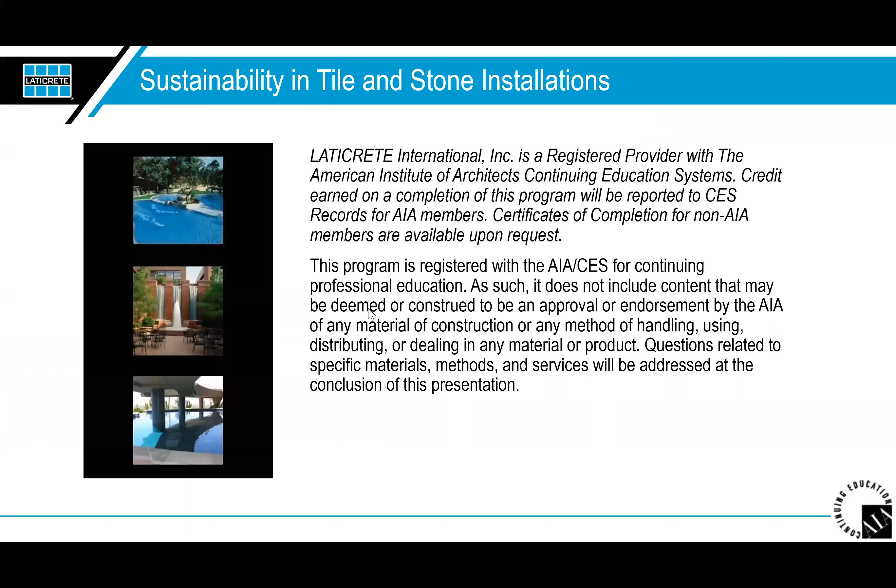Learning objectives today: this presentation will address green construction concepts and the challenges and benefits of green construction, as well as what they mean to the tile industry. We will also talk about why the tile industry has to get on board with being green and be at the forefront of moving that forward. This presentation will also address any recent changes to LEED and the Living Building Challenge, and what information is currently available and where to get it.

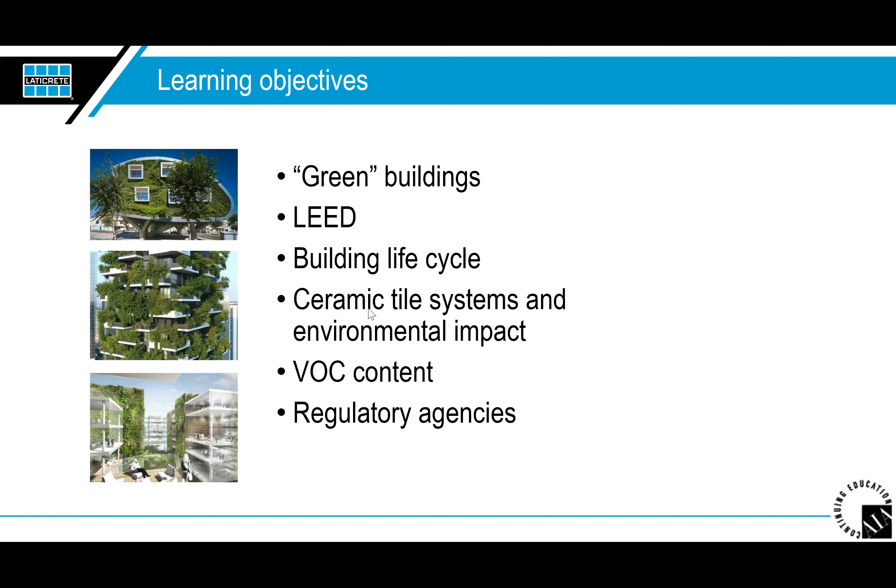Understanding the life cycle and comparisons between tile and other floor finishes, learning how ceramic tile systems compare with other floor coverings regarding sustainability and environmental impact, and understanding the VOC content in ceramic tile and installation materials.

The world's not what it used to be. There's little doubt that design, construction practices, and material production have come a very long way over the past couple decades. Buildings are more environmentally friendly, healthier for building occupants, and built to higher construction standards. And really, they're more beautiful and functional than ever. The biggest reason for constructing and renovating a building to a green standard is to minimize the impact of the building, both during construction and throughout the life of the building, on the environment and the people in the building, while improving the profitability of the building and increasing the return on investment.

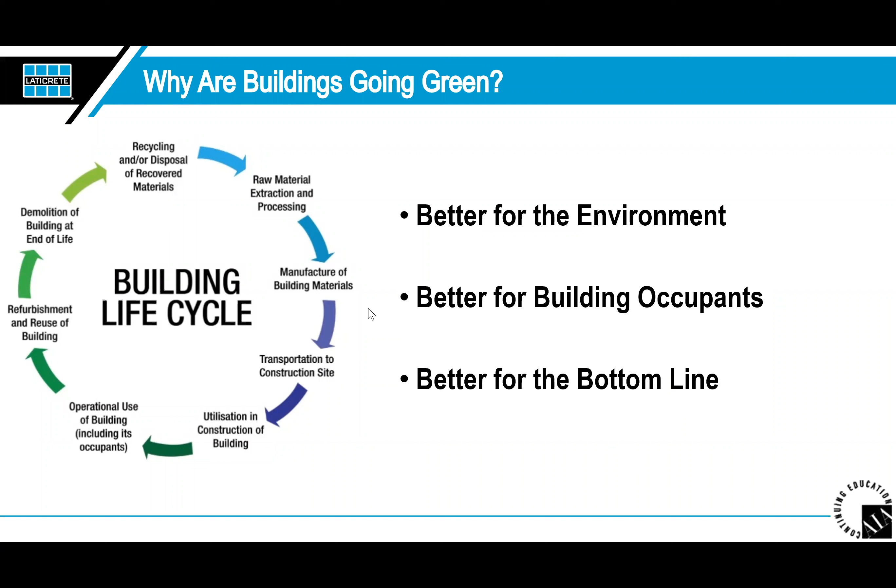We'll talk about each of those impacts in the following slides coming up. A green building is a building that in its design, construction, and/or operation reduces or eliminates negative impacts and can create positive impacts on our climate and natural environment. Green buildings preserve precious natural resources and improve our quality of life.

There's a number of features which can make a building green. These would include things like efficient use of energy, water, and other resources. Use of renewable energy - solar energy is getting very popular now; it has been and continues to get more popular. Pollution and waste reduction measures - how much are they able to reuse and recycling measures that they take in the building itself.

Good indoor environmental air quality, a big factor with the world we're living in right now. Use of materials that are non-toxic, ethical, and sustainable. Consideration of the environment in design, as well as consideration of quality of life of the occupants in its design. And then lastly, but not least, a design that enables adaptation for a changing environment.

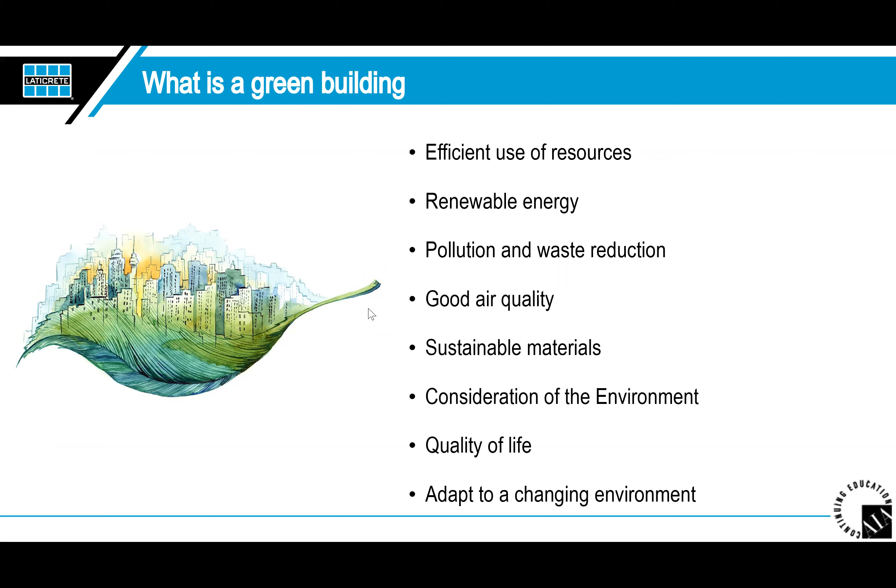It's been stated that people spend almost 90% of their lives indoors, and that some interior environments may actually be more polluted than exterior environments. Maintaining a healthy indoor working environment is critical to maintaining a healthy and productive staff who enjoy coming to work every day. A building environment that is well designed, nicely decorated with plenty of natural light, views of the outside, temperature controlled, comfortable, and which contains no toxic or harmful chemicals, will not only command a higher rental fee, but it would also maintain a higher selling price in the future.

One of the key drivers to having green buildings and green building programs was an event which occurred back in 1976 in Philadelphia at the Stratford Hotel. It consisted of the American Legion Convention, and they had around 2,000 people that attended.

A total of about 220 attendees actually contracted Legionnaire's disease, and 34 of those people died from pneumonia caused by the disease. It was determined that the hotel's HVAC system became an ideal environment for growth of Legionella, the bacteria that causes Legionnaire's disease, and it was an efficient way to distribute the disease throughout the structure, coming into every room.

Poor air quality is one of the major causes of why employees miss time at work and generally drives production down. Adhesives, paints, sealers, and other materials used in the green project can have an adverse effect on the building's occupants. Using low VOC content and low VOC emitting materials has a profound effect on building occupants and on the people constructing the building themselves.

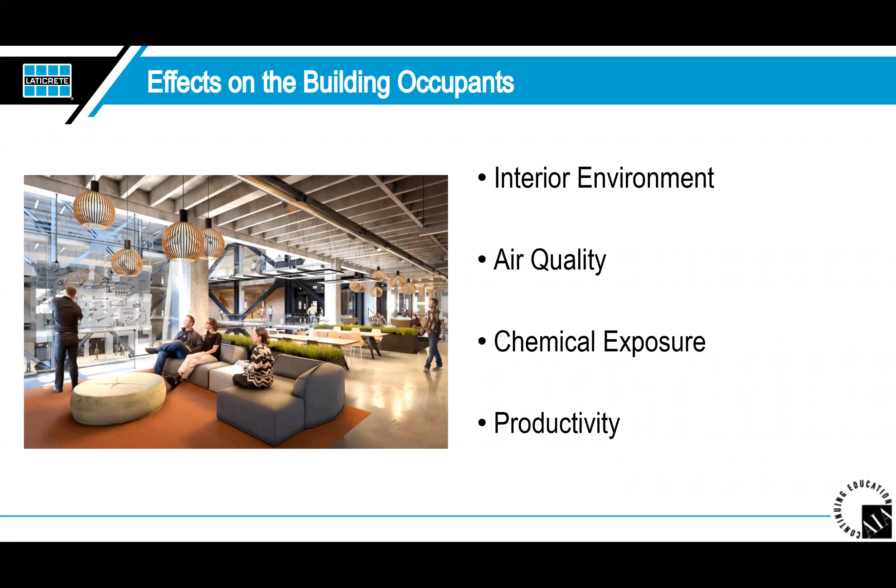As we mentioned earlier, buildings are the largest users of electricity, so it only makes sense that saving electricity could also save money for the building owner.

Back in 2014, the University of Hawaii did a report claiming they saved $3.4 million just in 2014 alone, based on reducing energy usage.

It has been reported that the return on investment of green buildings improves by 19%, with lower electrical costs being a large contributor to the savings. Auto shut-off lights are an example of that.

Lights operating on motion detectors, for example, low energy use bulbs, best practices for building occupants, and improving the efficiency of the HVAC and the rest of the building's infrastructure, all help lessen energy usage.

Buildings which meet LEED rating criteria may be eligible to receive tax credits based on federal, state, and local laws as well.

Energy credits or income revenue can be achieved if the facility produces its own electricity and sells power generated during times when the facility is using minimal energy, so they can actually sell it back to the electrical grid. Solar and wind electrical generation are two of the most widely used methods of producing electricity on site.

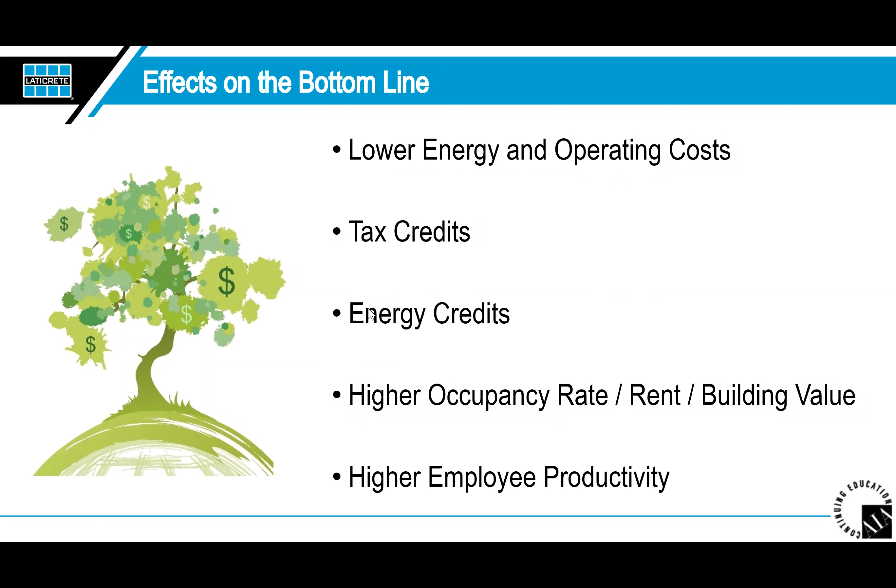So the benefits of a green building, as we discussed, include reducing wastage of water, conserving natural resources, improving air quality as a big factor, protecting the ecosystems as well, reducing operating costs, improving occupant productivity, and the social benefit of improving the quality of life in general.

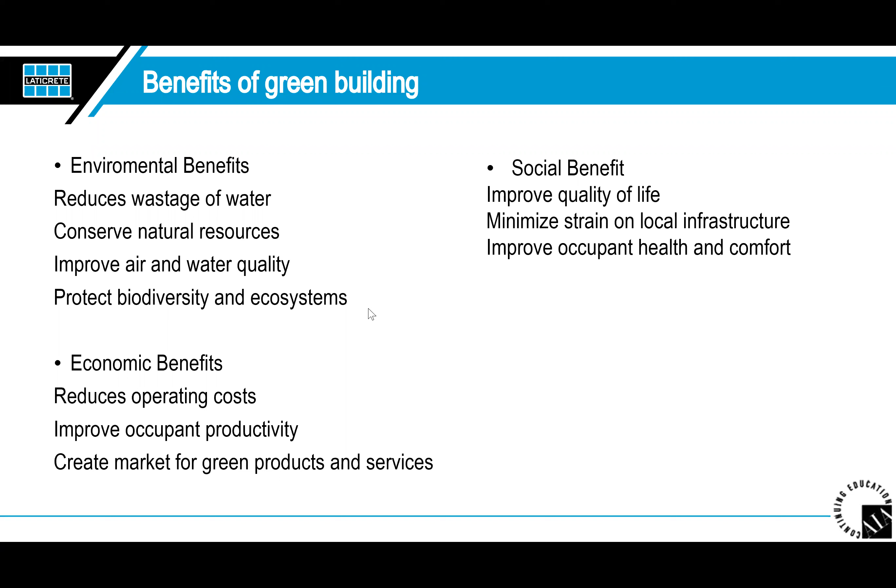There's a number of different building standards and rating systems used around the world. Due to a time crunch, I'm going to focus on the two most commonly used: LEED, by the United States Green Building Council, and the Living Building Challenge, by the International Living Future Institute. The main focus today will be LEED because it's the most widely used green rating system on the planet. While the Living Building Challenge is gaining traction, it's still behind the US GBC's efforts in terms of total number of projects, global use, and overall acceptance.

The global green building market is forecasted in 2019 to be $234 billion, including an estimated 20% of all US commercial real estate construction. This trend is expected to intensify in coming years. It has been estimated that commercial building owners and managers will invest around $960 billion globally by 2023 on greening their existing infrastructure. So they're going to be doing a lot of green work on buildings that already exist too.

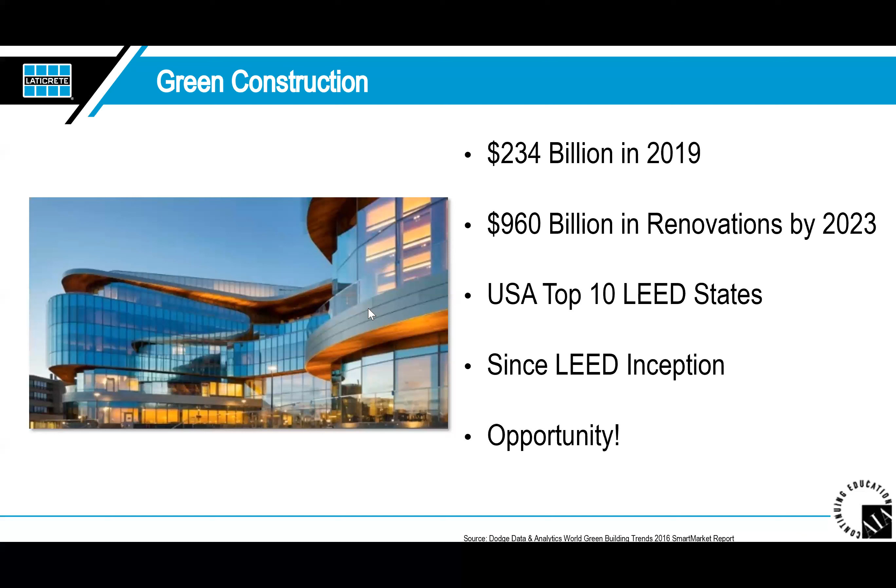LEED is the most widely used green building rating system in the world, with around 80,000 projects certified in construction or registered across 162 different countries. As of June 2015, there had already been 32,500 certified commercial projects around the world, and among all LEED projects, there have been around 4 billion square feet installed, as estimated.

It's my understanding that individual countries have some ability to customize the LEED rating system to meet local requirements, different design practices, and resources they use, but in general the result will essentially be the same. The building pictured here is Taipei 101, which is the largest and tallest LEED platinum building in the world, current as of 2015.

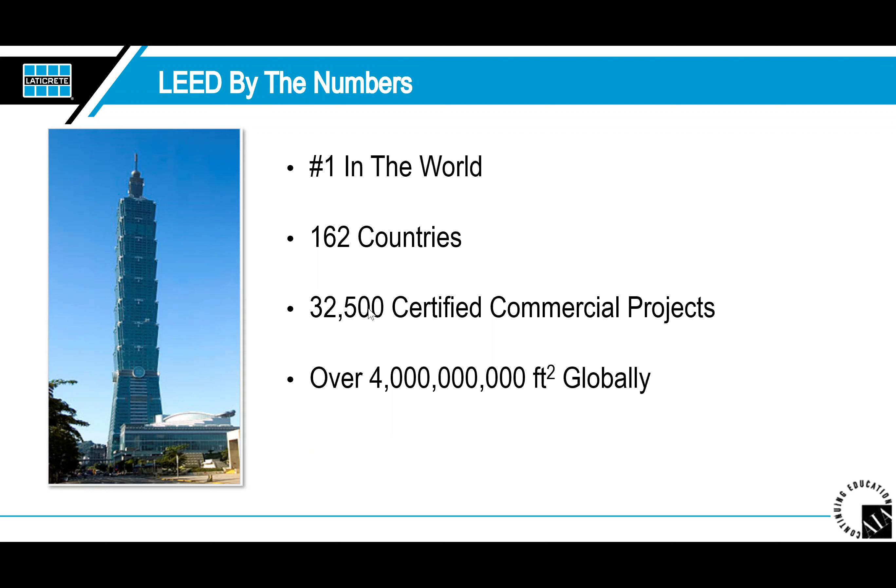LEED, Leadership in Energy and Environmental Design, is an internationally recognized green building certification system developed by the U.S. Green Building Council. LEED provides building owners and operators a concise framework for identifying and implementing practical, measurable green building design, construction, operations, and maintenance solutions, improving performance across all the metrics that matter most: energy savings, water efficiency, CO2 emission reductions, improved indoor air quality, and sensitivity to impacts on natural resources.

LEED is flexible enough to apply to all building types, commercial as well as residential. It works throughout the building life cycle, going from design and construction to operations and maintenance, to tenant fit-out, and then to a retrofit if needed down the road.

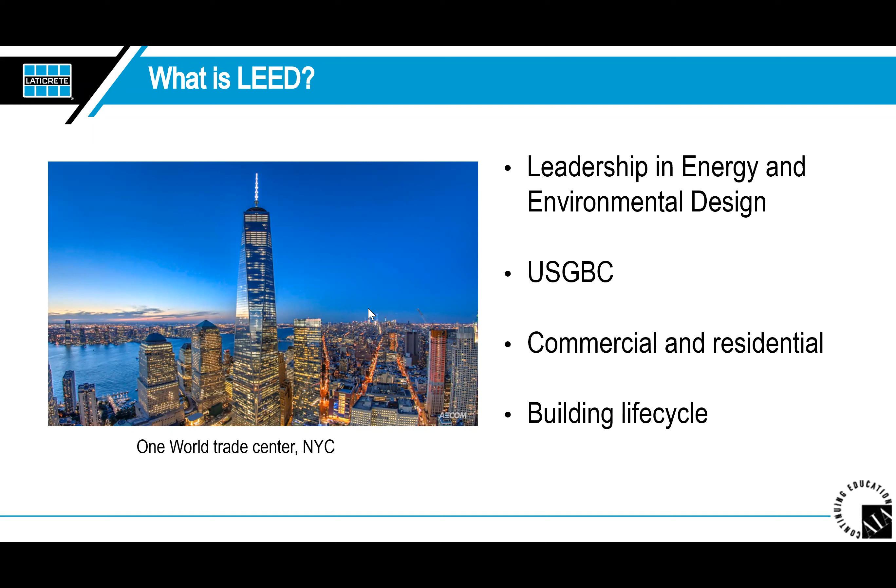LEED provides a point system to score green building design and construction. The system is categorized into 5 basic areas: sustainable sites, water efficiency, energy and atmosphere, materials and resources, and indoor environmental quality. Buildings are awarded points based on the various sustainable strategies achieved. The more points awarded, the higher the level of certification, so you can go from certified to silver to gold, and currently the highest ranking would be platinum.

LEED certifications, which will be the focus of this article, are designed in accordance with the rating system for the sustainability of the design, construction, maintenance, and operations of the building. They have different types of identifications for that: BD+C is an example, which is building design and construction. Then you have interior design and construction, building operations and maintenance, neighborhood development (ND), and also homes, which has no abbreviation. LEED is a living rating system. After authoring a rating system, it goes through a lengthy, field-piloted refinement prior to the official launch.

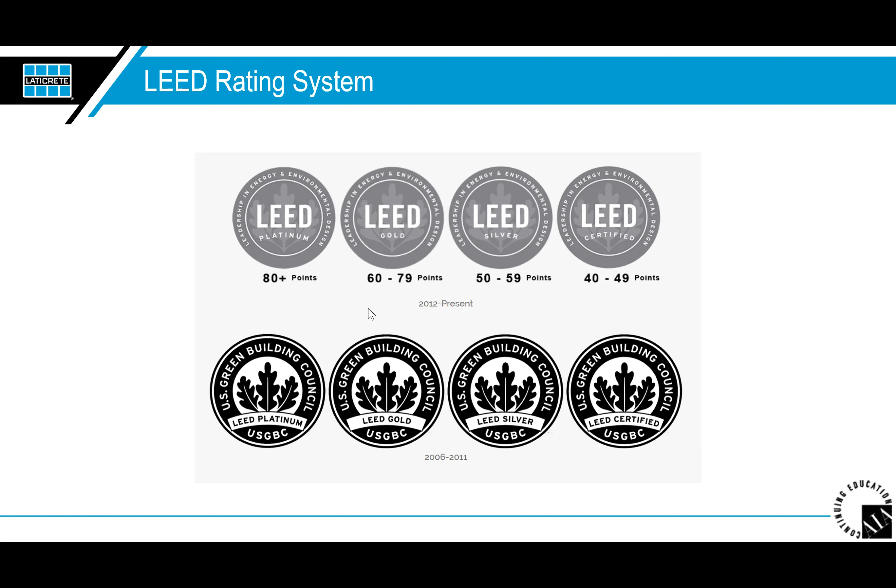LEED V4 was made mandatory for LEED projects registered as of midnight on November 1st, 2016. LEED V4 is very different than its predecessor, LEED 2009, which required an almost unimaginable amount of transition work for many in design, construction, and construction materials manufacturing industries. I don't have enough time here to discuss all the changes and differences between the 2 rating systems, but we will address a couple further on in the presentation.

There are 8 different categories: location and transportation, sustainable sites, water efficiency, energy and atmosphere, materials and resources, indoor environmental quality, innovation, and regional priority. There are 110 available credits to choose from when determining which LEED level the project will achieve, whether it be certified, silver, gold, or platinum.

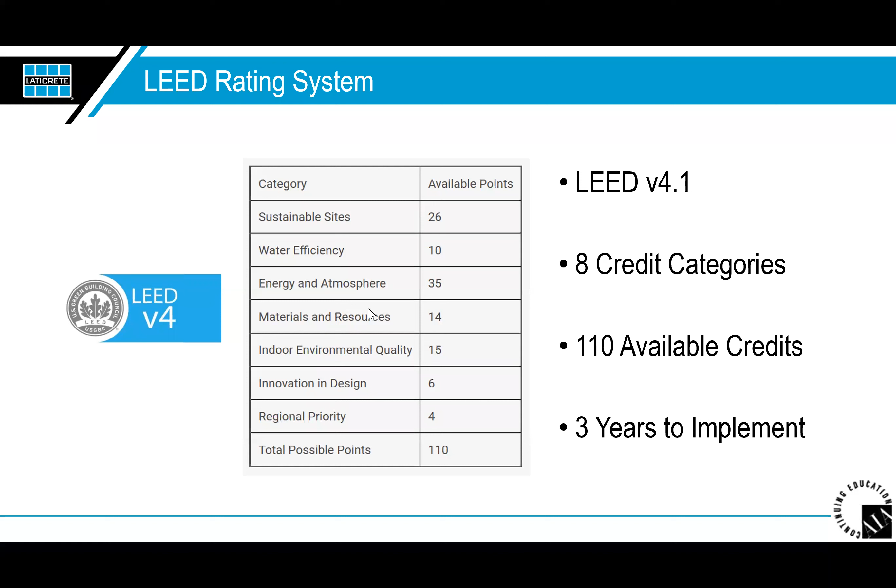By participating in LEED, owners, operators, designers, and builders make a meaningful contribution to the green building industry. By documenting and tracking the building's resource use, they contribute to a growing body of knowledge that will advance research in this field and improve the system over time. We've already talked about lower operating costs, energy and water conservation, the health of building occupants, and the financial incentives. However, there are other benefits as well.

Recycling the waste or scrap of building materials means less waste going into landfills. It also helps support the recycling industry, which promotes the development of newer and more efficient recycling technologies. So we're helping that industry out as well.

Another impact of lowering energy use is that less electrical use means demand for power from electrical generating facilities goes down, and therefore we have lower greenhouse gas emissions. This helps air pollution, lessens the impact of these gases upon the ozone layer, and generally lowers the impact of these emissions on global warming as well.

Excuse me, one second.

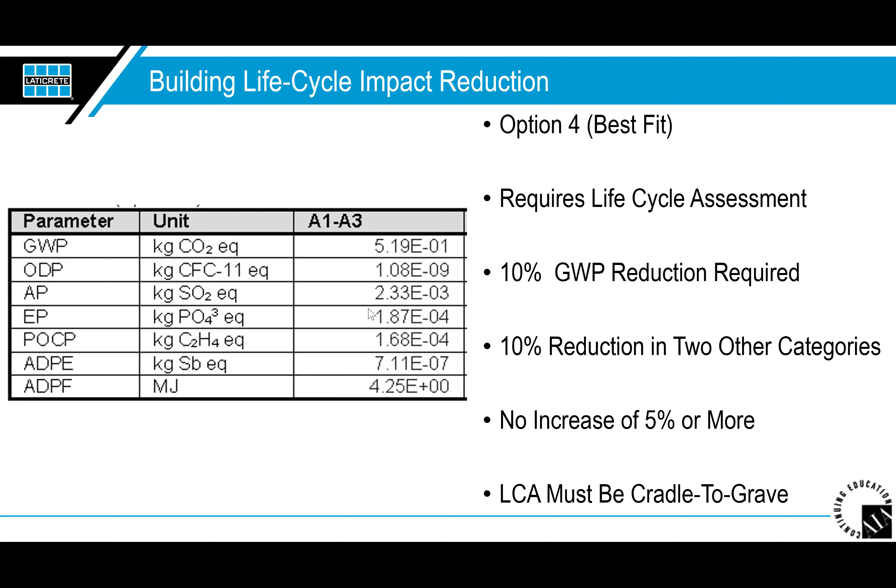Including global warming potential, depletion of the ozone layer, formation of tropospheric ozone, and depletion of non-renewable energy resources. The best fit for tile is option 4 of this credit. The credit requires a 10% reduction in global warming potential and a 10% reduction in at least 2 of the 5 categories without increasing any by more than 5%. The life cycle assessment performed must be cradle to grave, so gathering proper information for all of its components is critical.

Building product disclosure and optimization environmental products declaration is a new credit for LEED V4. An EPD is a comprehensive, globally harmonized, and independently verified report created for a product manufacturer or manufacturers with documents that impact the environment throughout its life cycle.

Information on these environmental impacts includes raw material acquisition, energy use, energy efficiency, content of materials, chemical substances, emissions to air, soil and water, as well as waste generation from cradle to grave and other standard time references. The EPDs are created and verified in accordance with ISO 14025 and are based on a life cycle assessment according to ISO 14040 and ISO 14044. So the intent of the EPD is simply to provide transparent information on the life cycle impact of the product over a designated time span.

Ceramic tile, actually made in the United States by 11 different manufacturers, has done the necessary work and gone through the steps to create an industry-wide EPD, which requires a life cycle assessment from each tile manufacturing company involved. The EPD from each company is then combined to create an industry average, which is reported to the industry-wide EPD.

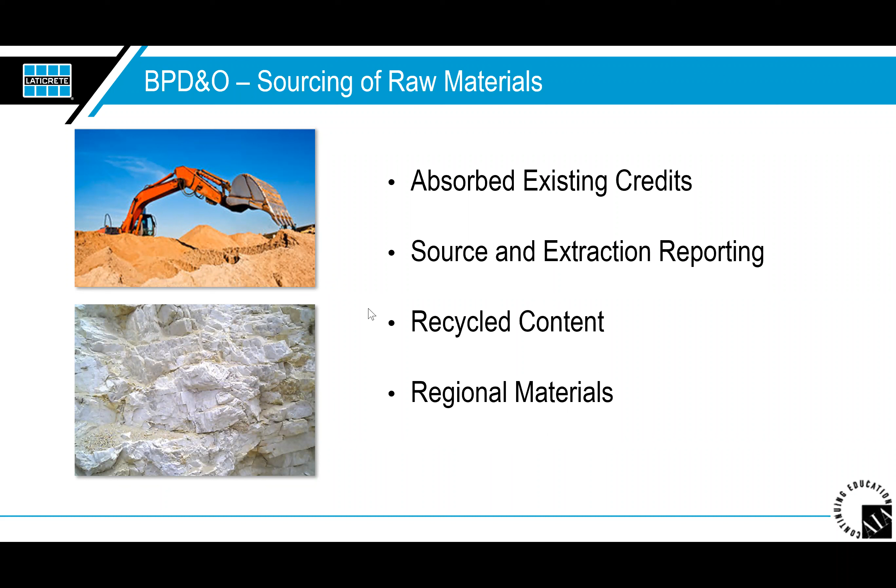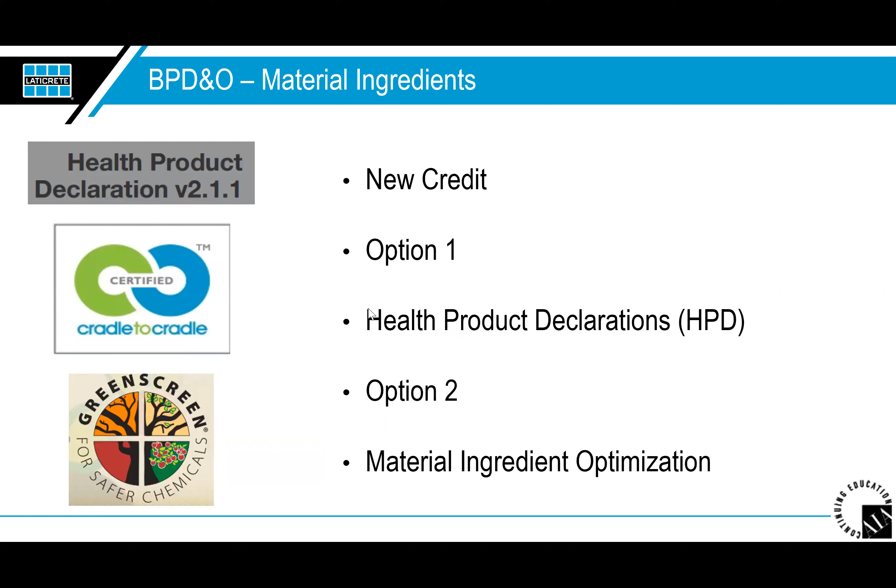The intent of the EQ credit, low emitting materials, is to reduce the concentrations of chemical contaminants that can damage air quality, human health, productivity, and the environment. This new credit combines 4 credits from LEED 2009 into one, and now includes the VOC emissions reporting requirements, which we were talking about earlier.

VOC content, as before, uses South Coast Air Quality Management District Rule 1168 for tile adhesives, subfloor adhesives, sealants, sealant primers, and other categories for determination of maximum acceptable VOC content levels. VOC emissions require testing to the California Department of Public Health standard method V1.2, and must be reported showing the range of total VOC emissions after 14 days as specified by the California Department of Health.

It's important to note that products which are UL GreenGuard Gold certified are tested in accordance with the California Department of Health standard.

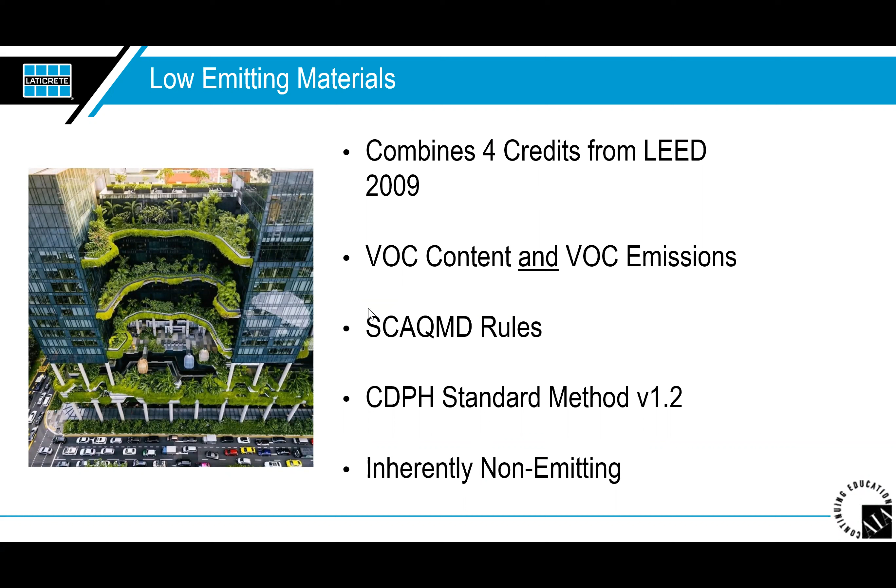The intent of the MR credit for construction and demolition waste management is to reduce the construction and demolition waste disposed of in landfills and facilities by recovering, reusing, and recycling waste materials. This credit has been edited from LEED 2009.

It was added to include waste-to-energy components, where combustible waste is diverted to facilities where the waste is burned and the energy is used to generate electricity. This option for waste to energy can only be used if there are no other viable options for recycling or reusing the materials.

Packaging materials used for tile and installation materials which can be recycled include corrugated cardboard, plastic bags, plastic buckets, and wood. The tile industry can contribute to this credit through the use of recyclable packaging. Tile typically comes in corrugated cardboard boxes, which is recyclable, and some tile installation materials come in bags, buckets, and containers, which are recyclable and should be diverted to the appropriate waste stream.

There are two options to achieve this credit. One is to divert a percentage of the waste to 3 or 4 different material streams and reduce the total waste of material in the streams, calculated by weight per square foot. While the materials themselves are heavy, the packaging that tile and installation materials come in may be recyclable and is typically light in weight. So while the total contribution to achieving this credit may not be huge, it is certainly available.

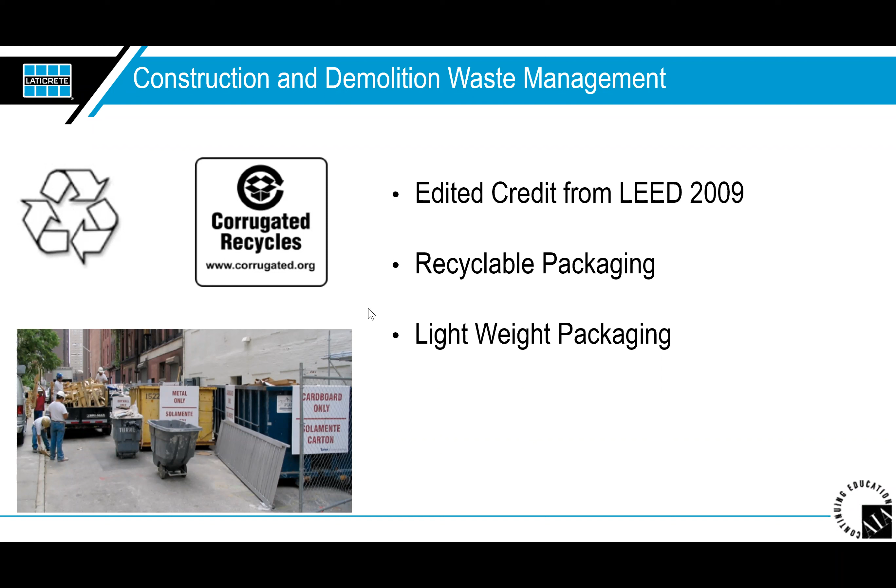There are two additional credits in which tile may play an active role: Indoor Air Quality Assessment Option 2, air testing, because tile and most tile installation materials have acceptable VOC content and no appreciable levels of other classified contaminants. There's no formaldehyde, no particulates, no target chemicals listed by the California Department of Health, and no carbon monoxide, for example.

The intent of the credit is to establish better indoor air quality after construction and during occupancy. The second credit, the construction indoor air quality management plan, is intended to promote the well-being of construction workers and building occupants by minimizing indoor air quality problems associated with construction and renovation. Since tile and most installation materials are low emitting and low VOC content, these materials can help contribute to achieving this credit.

The fact that tile and tile installation materials are essentially no or low VOC emitting means the impact would be zero, and on assessment they would be negligible for the air quality plan. That means the building should do no worse in these categories compared to other finished materials.

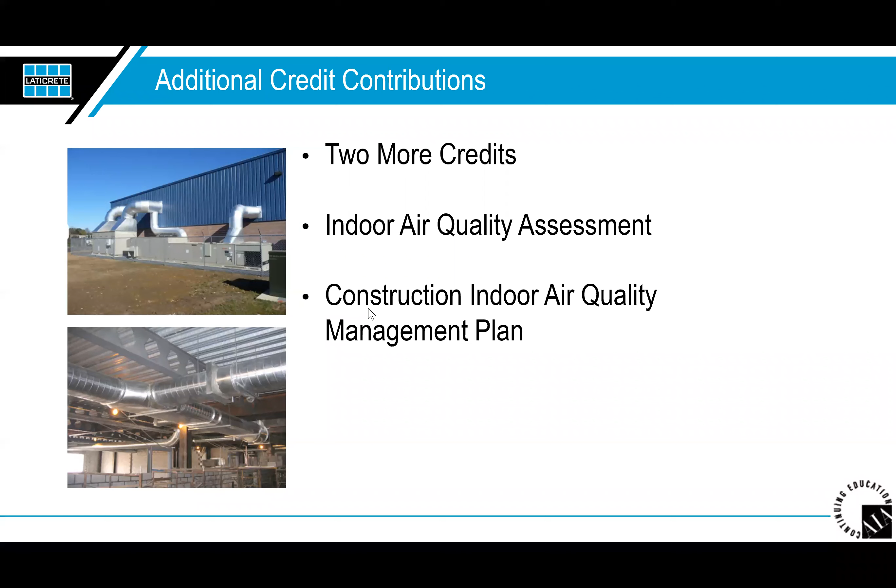The Living Building Challenge was created by the Living Future Institute in 2006 and launched by the Cascadia Green Building Council. In 2011, the Living Building Institute was renamed the International Living Future Institute. The LBC is the world's largest and most rigorous proven performance standard for buildings.

It's designed to create buildings that are regenerative spaces connecting building occupants to light, air, food, nature, and community, and that are self-sufficient and remain within the resource limits of their site. They produce more electricity than they use, and they collect and treat water on site as well. They create a positive impact on the human and natural systems that interact with them.

LBC structures are designed and built to last for 100 years or more, and they have to be healthy and beautiful. Essentially, buildings constructed to the standard give more than they take.

The LBC is organized into 7 performance areas, based on the metaphor of a flower, called petals. Each petal has detailed requirements related to the area it covers. We'll stick to discussing the 7 performance areas here.

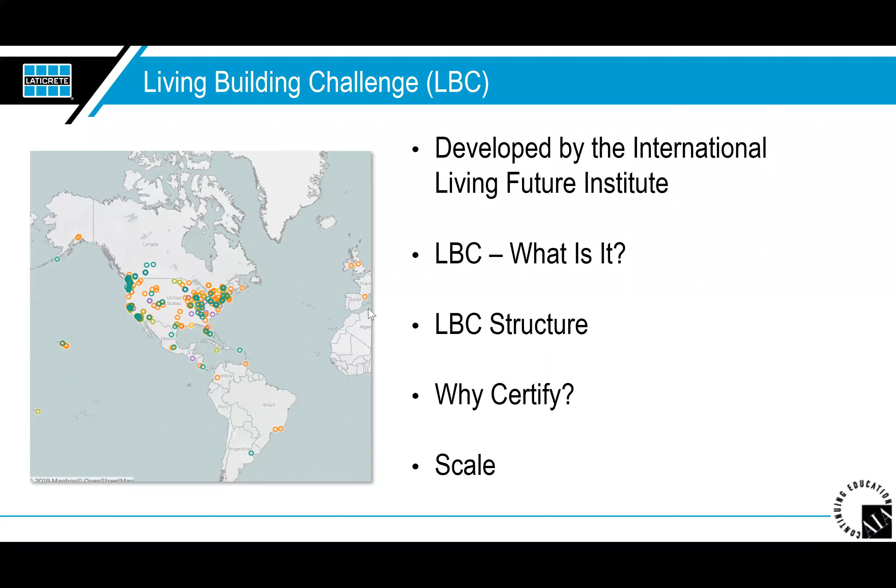So the 7 petals that we were just talking about on the last slide, the 7 petals of the LBC flower are the place, the water, the energy, the health and happiness, the materials, the equity, and the beauty. In these petals, there's a total of 20 imperatives shown on the slide.

In the interest of saving time, we'll just focus on the petals that affect the tile industry. For tile and stone, resinous flooring, sealers, surface preparation, concrete repair, and other manufacturers, the material petal is the primary focus. In these categories, the LBC Red List V3 is of utmost importance, which we're going to talk about next.

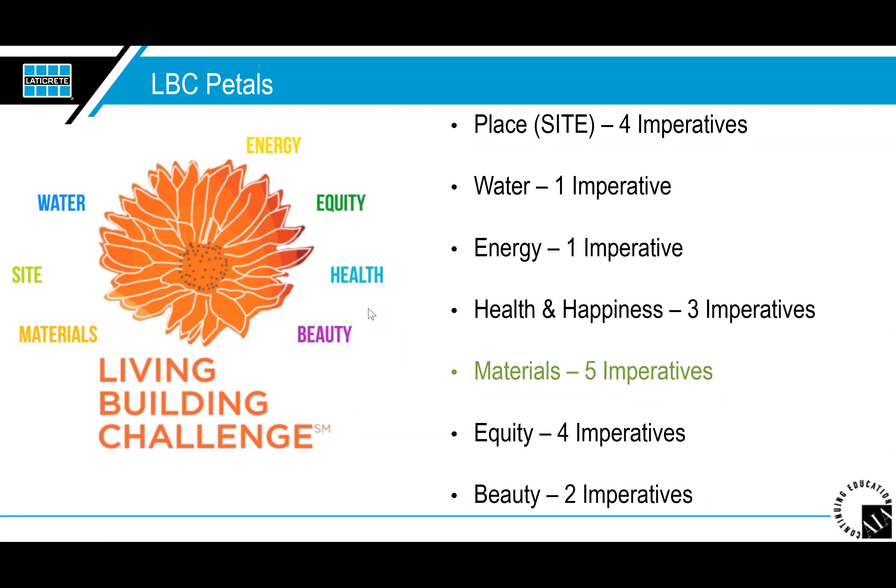In the material petal of the LBC, the red list refers to the chemicals and materials which are banned from use on LBC projects. In the current version, V3.1, it lists over 800 chemicals that are banned for use in LBC buildings at any concentration level. It also states the allowable VOC levels for the products used in the buildings. This list, shown in the slide, designates the categories of chemicals which are banned from LBC buildings, but there can be many other chemicals under these actual categories themselves.

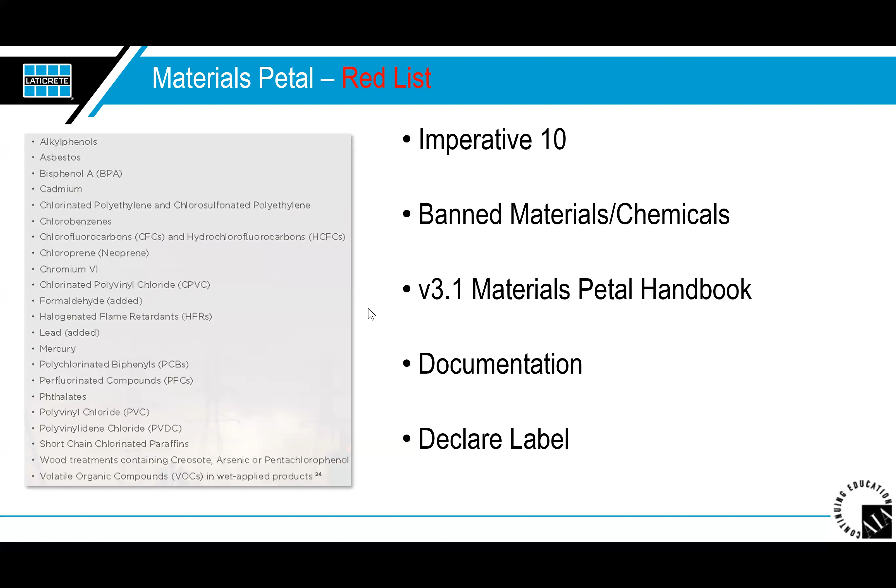So the second part of the materials petal is the responsible industry. This imperative advocates the creation and adoption of third-party certified standards for sustainable resource extraction and fair labor practices. This applies to raw materials like stone, rock, metal, minerals, and timber. This can affect both the tile and tile installation raw material suppliers and the extraction and processing practices. For instance, dimensional stone quarry manufacturers may need to be certified under the Natural Stone Council 373 standard.

Health product declarations are a key piece of information provided to an LBC project. As stated earlier, the HPDs state the hazards associated with the raw materials and their components, as well as many other raw materials which go into the product by name and CAS number.

If the HPD states the actual chemical or trade name of each of the components by name, and the list confirms that there are no red list materials present, then the HPD will suffice as proof that the product is a red list free material.

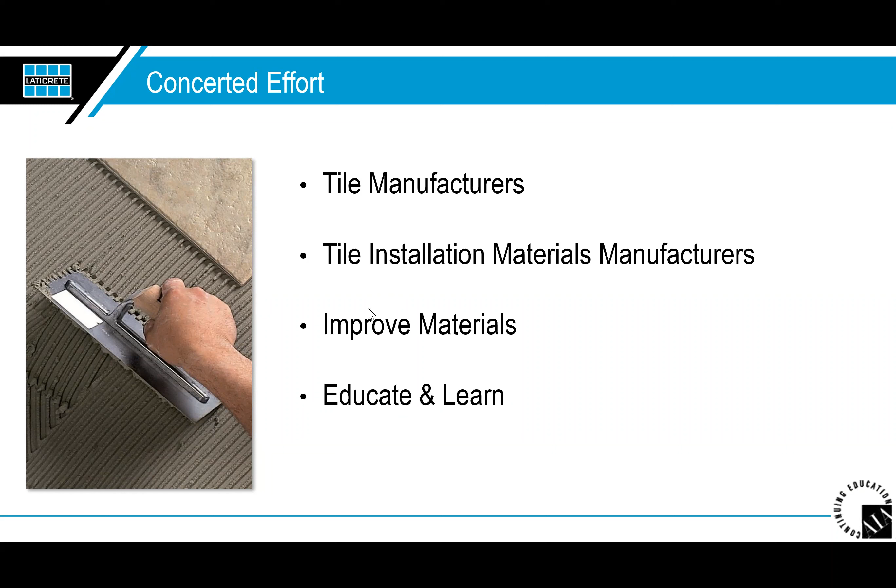There's no doubt about it. Green construction is fast becoming the standard to which all buildings will have to comply, both in new construction and remodels. The government has placed strategies and timelines in place for all projects to meet very specific goals. Both LEED and the LBC are leading the way by providing demanding but achievable standards for buildings to comply with, providing benefits for the environment and for the inhabitants of the structures.

The tile and tile installation material manufacturers are teaming up to make sure that the information they provide is as transparent as possible, to make credit achievement easier and faster when using these products. As always, the best way to know and understand the standards and their requirements is to stay in touch with manufacturers who provide the critical information for LEED credit achievement or LBC Petals and imperative compliance. In the end, everyone will benefit, including the environment itself.

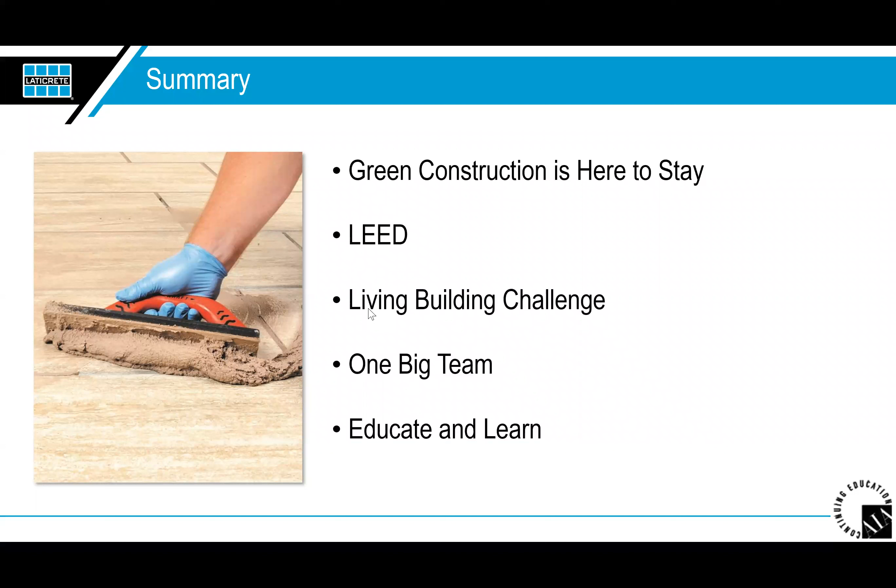Now that the CEU portion of the presentation is completed, I would like to take a quick moment to talk with you about qualified labor in the tile and stone industry. You all come to me expecting the best results in products and services, but those quality goods deserve to be installed with high quality labor as well.

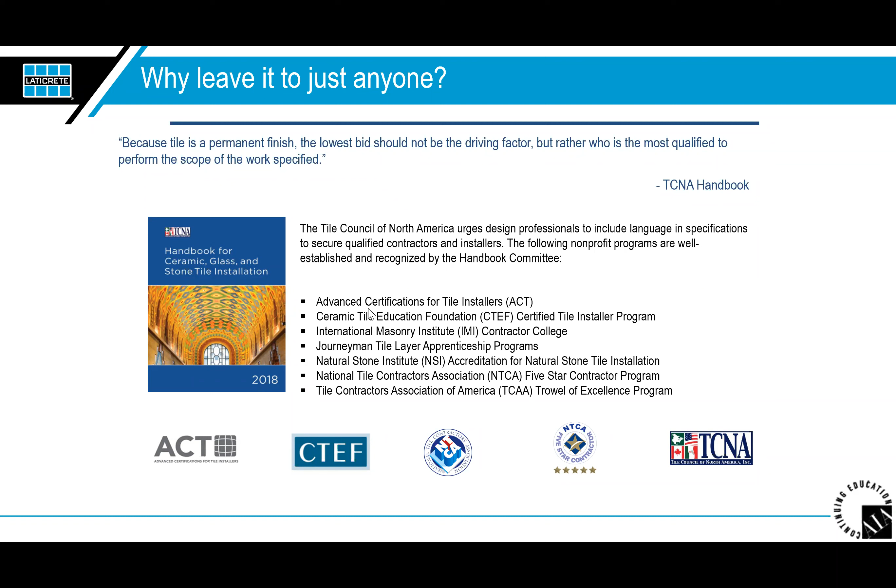In the image there, it's something very popular in our industry, working with the National Tile Contractors Association, NTCA. But when you're talking about the installer themselves, there are many different options: the Ceramic Tile Education Foundation, 5-star installers, and CTIs, which are certified tile installers capable of installing these products correctly and efficiently to meet all the green building standards.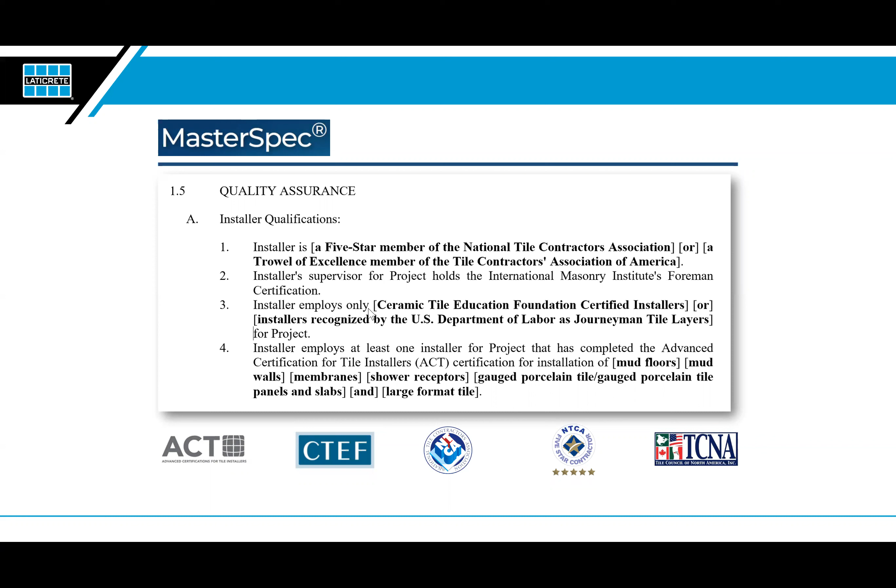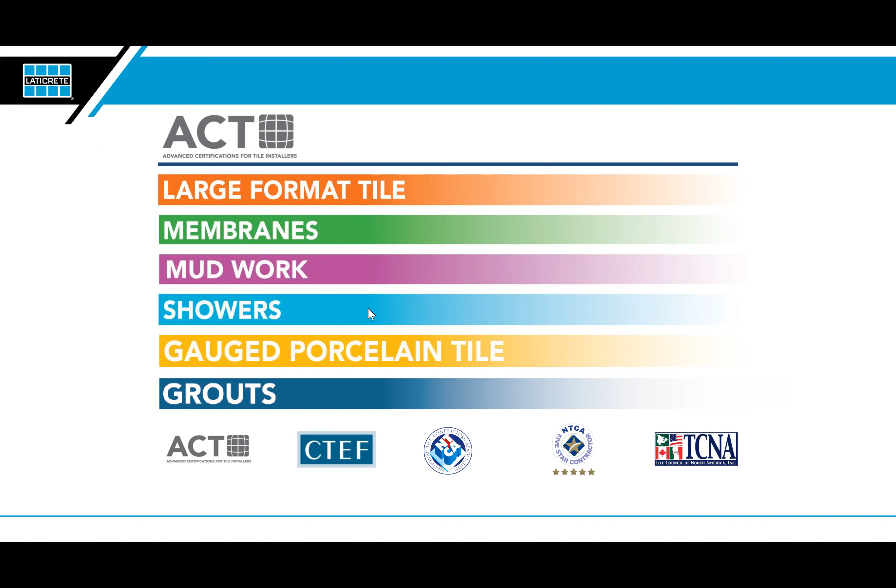The ACT is a program that offers advanced certifications for tile installers in specified areas. Again, that's what they're going after - large format tile, which is what we're using every single day, membranes, mud work, showers, gauged porcelain tile, and different types of grouts.